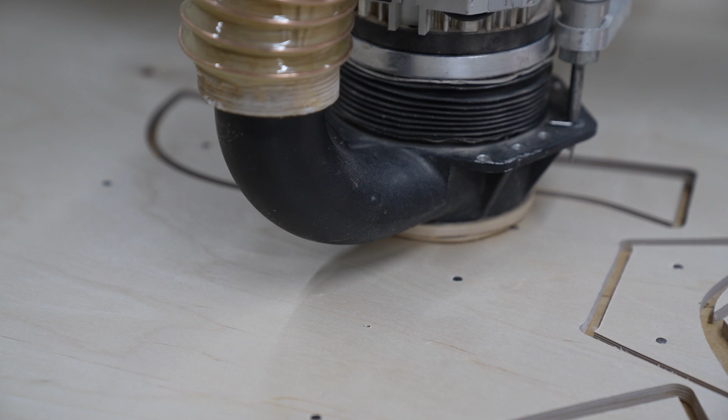Now I'm going to hand you over to Phil, who's going to talk you through the process of cutting and making the trees.

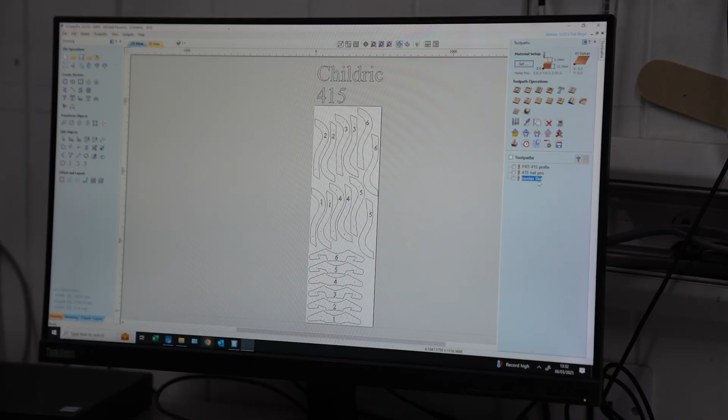The first thing we do, the customer gives us the design that they want the tree to look like. We then digitise it over there and it comes over onto this computer, which gives us the facilities to manoeuvre this to however we want it, to whatever shape we want. We test it first on here and make sure that it's doing what we want it to do.

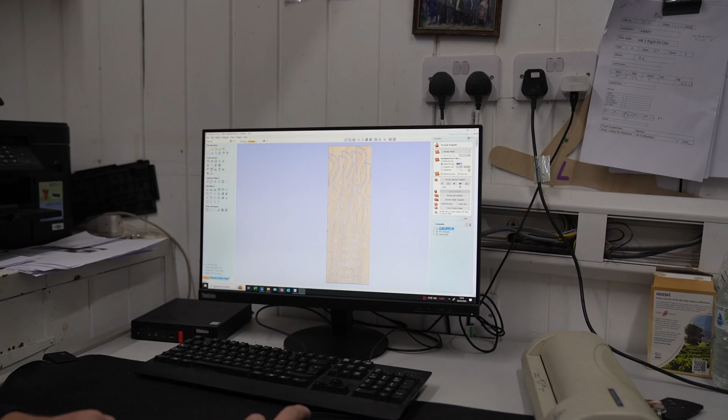We'll highlight it, slow the speed down, and put it on to cut. It will then cut this program and simulate exactly what it's going to do when it gets to the main machine. We've now imported the program over to the 3-axis machine in the other shop. We'll go now and have a look and watch it cut out what we've told it to do.

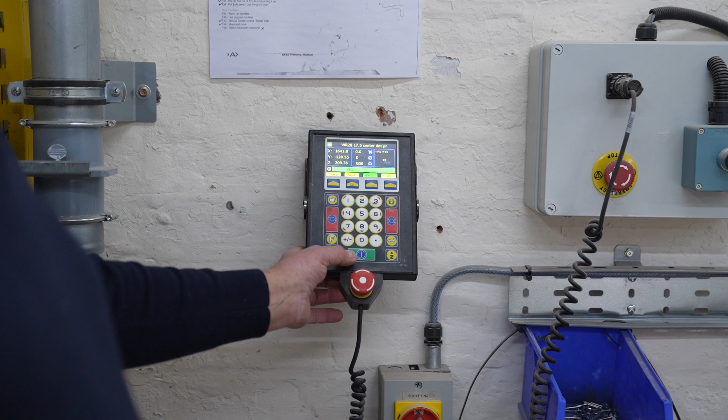So this is the 3-axis machine now. We've brought the program over, it's in here, and we hit the start button. The machine will now come over and put centre dots in so that everything can be central on the mould. This helps when they get to the next section and it goes on the moulds - they can use these dots to line it up completely central so they know everything's completely square.

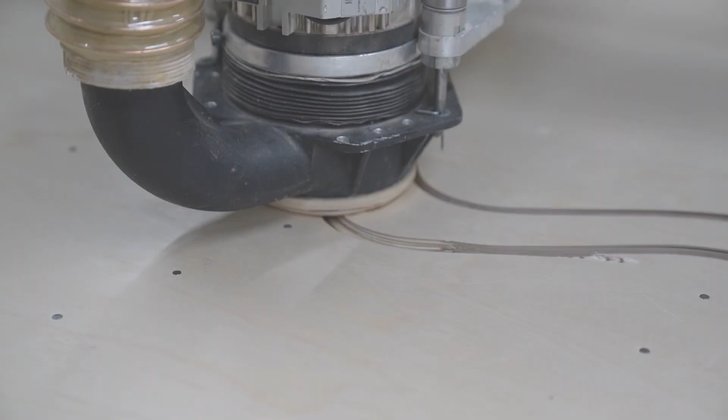This machine here is the 5-axis machine that we cut the cantles out on. It works the same as the other one, but you've got more movement. So we do this face here, this cut here, and this cut here. If you want to pop into the machine now, Richard will start it off for you and watch it go.

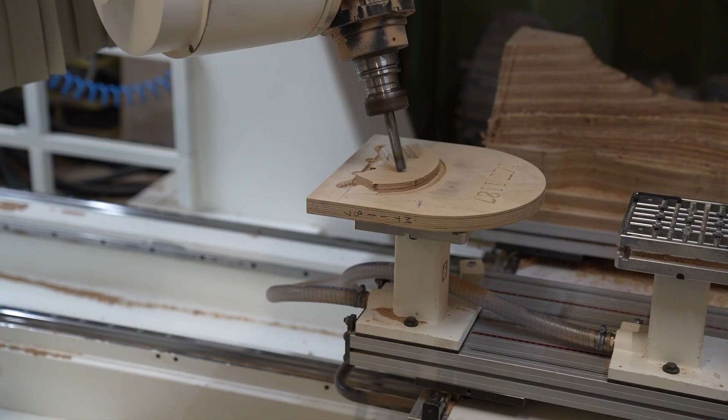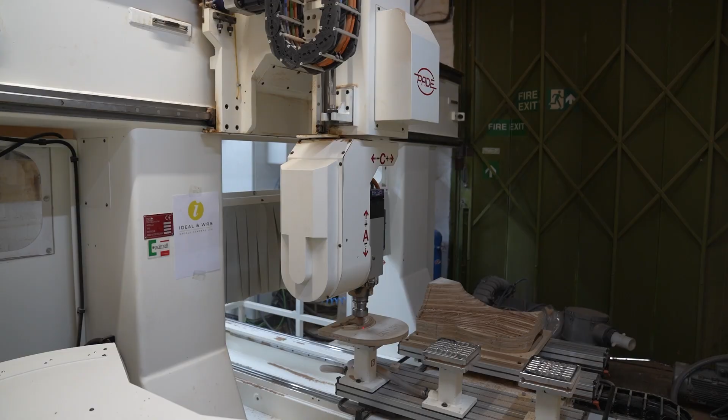After we've cut the blanks out on the machine, they come in here, where we use a vacuum press to suck them into the forms. As you can see, Callum here is laying up the first layer. Most trees have 6 layers, some have 5, but the majority have 6 layers. So that's his first layer.

On his second layer, we do all the joints cross over, and they always cross over at this point here. The first layer's there, the second layer goes half an inch further up, and the third layer goes another half inch up. All the joints are in this area simply because we have a metal gullet plate, which you'll see later, and we also have the bar and a spring, so all the strength here is reinforced with the metal work.

So now, as you can see on the third layer, it's up another half inch at least. That's layer 3. Layer 4 then reverts back to the same as layer 1, so we go again. Then it goes into the machine.

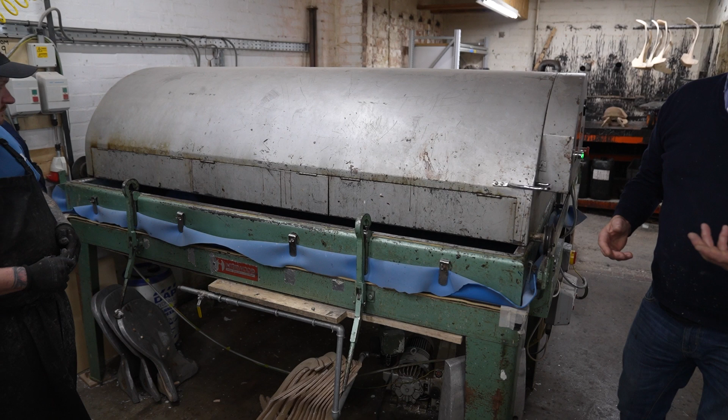That's just a protective layer to stop it puncturing the top of the bag. We have a vacuum pump that pulls all the air out and sucks the laminate down onto the mould. Callum's now giving it a little tap just to make sure all the air's out completely and there's no trapped air anywhere squashed in. Then we pull the hood over, which is heated - heat comes down, dries it, normally a 10 to 12 minute process.

After the tree has come out the laminating, it comes over to this section where it has the rear put on it, which is the cantle. Brian now will show you how he puts the cantle on.

After Brian has put the cantle on and it's come out the oven, it now goes to David, who then puts all the edges on, brings the cantle into it so it's all nice and smooth. Can you show us how you do that, please, David?

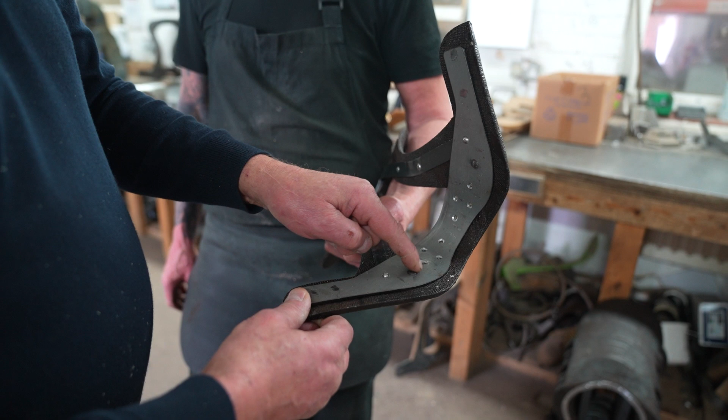As you can see, they're all reinforced. As we said before about when we were cutting them on the machine, all the joints are here, so everything here is reinforced with metal. We also have a bar on here, which makes it a lot stronger. So the weakest part of the tree is where the joint is, and we get it all covered in metal and strengthened up.

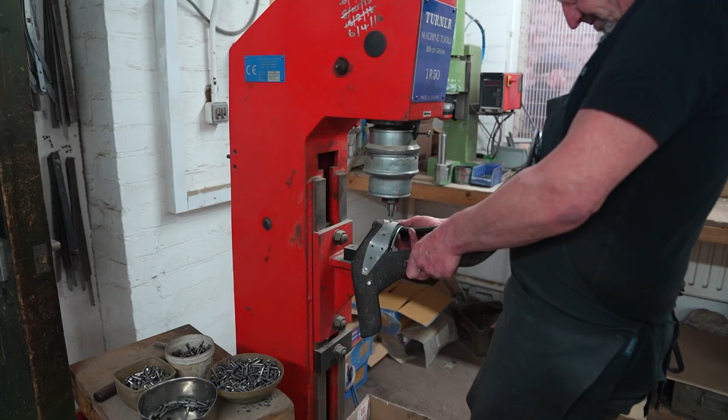Once Chris has done all the metalling, this is where he gets to at the end, where he's put the metalwork on the top, the metalwork on the bottom, the springs, the bar plates, the cantle iron and the bars. If you look at where all this is, all the strength is in this area where we've joined the wood, so we get the maximum strength. Everywhere else on this is normally one piece of wood really.

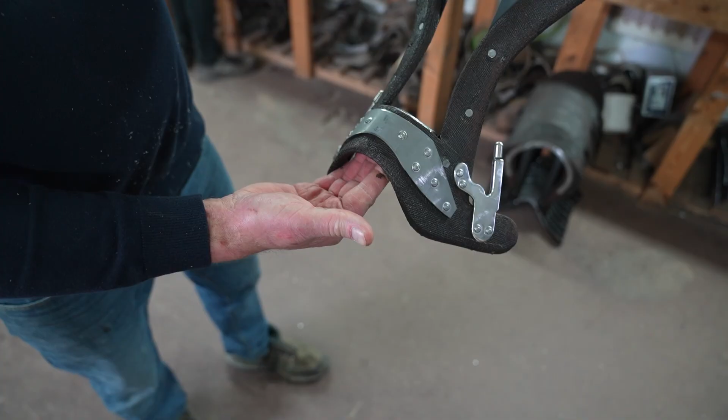So that is the finished product. That goes off now and gets varnished, checked off again for its symmetry, and that is completely the whole process from start to finish.